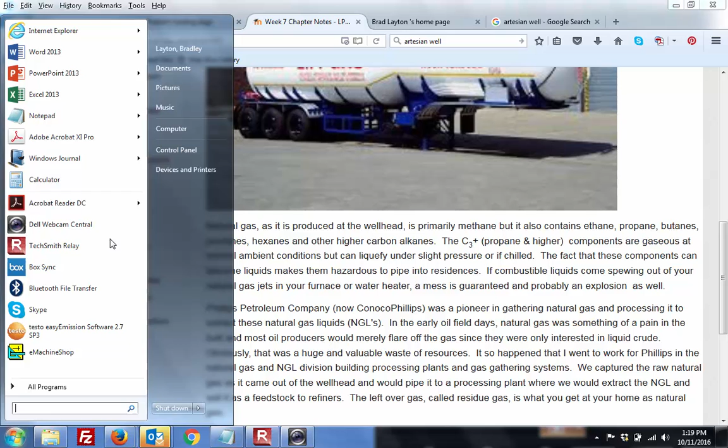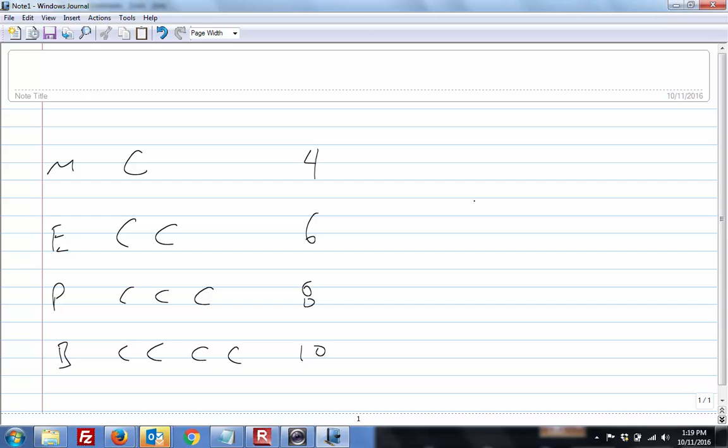The general formula for this, if we do a little simple math: here's methane, 2 carbons is ethane, 3 carbons is propane, 4 carbons is butane. And if we know this has 4 hydrogens, 6 hydrogens, 8 hydrogens, and 10 hydrogens, what's the formula for this thing? It's basically CnH2n plus 2, if that makes sense.

So let's try it out. For methane, if n equals 1, we have C1H, 2 times 1 is 2, plus 2 is 4. For ethane, n equals 2, C equals 2, 2 times 2 is 4, plus 2 is 6. If n equals 3, we have C3H, 3 times 2 is 6, plus 2 is 8. And finally C4H10, because 4 times 2 is 8, plus 2 is 10.

Of course, you could go ahead and draw these out, and in every case you have saturated bonds. There's ethane - I'm not going to draw all the hydrogens in, but you can count them, each line is a hydrogen - and then butane, just on up the scale. So if you see this formula, it's basically these simple hydrocarbons, starting with the simplest, methane.

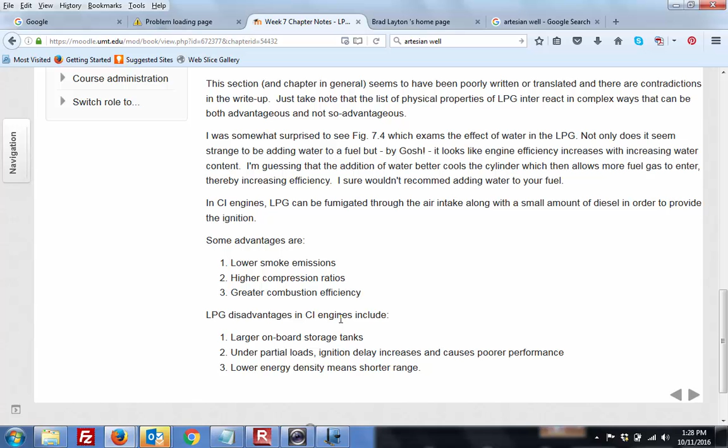So we already mentioned larger onboard storage tanks, and lower energy density, so you can't go as far unless you have a larger tank.

Wouldn't adding water also add oxygen to the process? Adding water - it says on that last page that you get better fuel efficiency. It looks like engine efficiency increases with increasing water content. I'm guessing the addition of water better cools the cylinder, which allows fuel gas to enter, thereby increasing efficiency.

It's a puzzle to play with for a bit, huh? Yeah, let's take a look.

7.4, that's a new one. That is not a test I have any direct experience with, I'll be honest. 7.4, let's dig into it a little bit. That's strange that you would add water, because water is one of the combustion products. I'm not sure why you would add a combustion product to your fuel in order to increase efficiency.

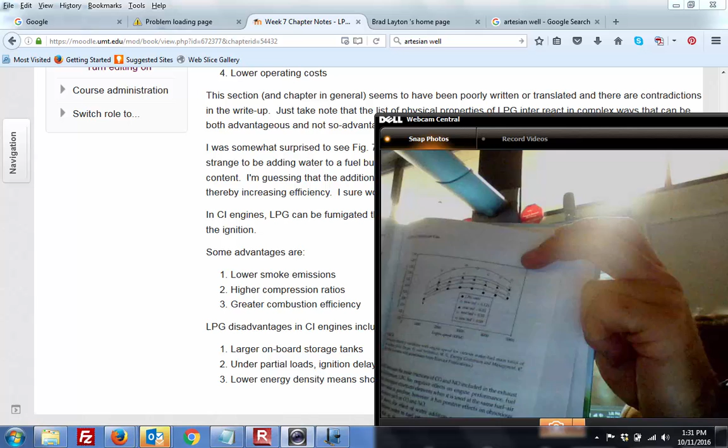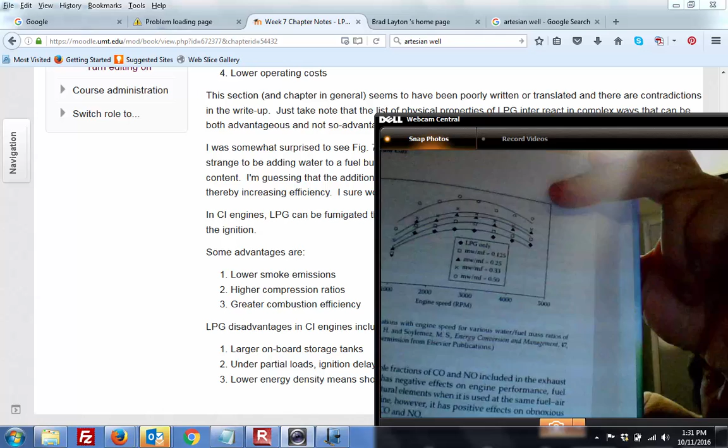Well, I think it goes to a sweet spot, and then it drops. It's not like - where's the sweet spot? What happens when I go to 60? I mean, in any other engineering chart - I'm not fully comprehending the brake thermal efficiency here.

I'm more looking at the integral beneath the curve here. Well, what I interpret the brake thermal efficiency to be is if the engine's just running under a braking load. And they're looking to see how much heat is being generated on that brake. And now, with just LPG only,

it is the lowest - this is the lowest efficiency overall. And as we get greater, so from an eighth to a quarter to a third up to 50%, at some point, oh, let's just put water in and burn. So this is not a well done graph.

The sweet spot would show, if in fact - 3,000 RPMs - well, but how about as a function? How about sweet spot as a function of water content? Where's the sweet spot? It's right on top. Well, then it's not a sweet spot because they didn't go all the way up to 100%. A proper graph would show it coming back down.

So when you got to 0.66, it came back down to where your 0.33 was. When you got to 90%, it would come back down to where your 0.125 was. So they didn't do a full fleshing out of it. Yeah, I like how they used the R program to make this diagram - well, you can tell by the X's and the O's.

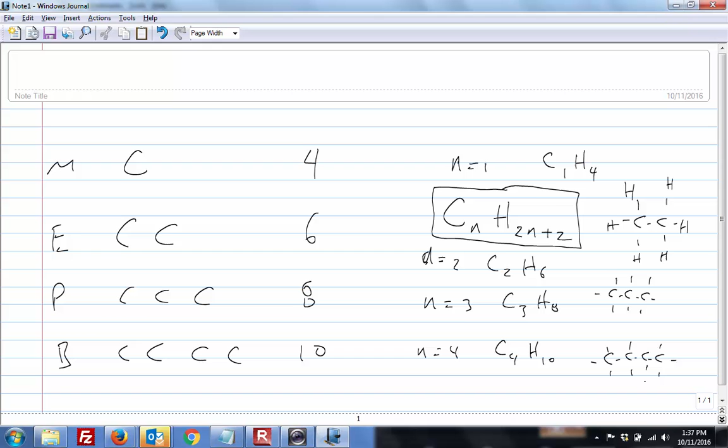I mean, we could do a little stoichiometry here. We like stoichiometry. So let's say we've got... let's see, we got this. Here's propane. We'll put butane in there.

And then if we just burnt these two guys, we'd have to dive pretty far into the thermodynamics here to get at this, but we just at least did the stoichiometry. And we started adding oxygen.

Let's just figure out. So we've got carbon coming out. We've got 7 carbons, and the only products we're going to get, let's assume complete combustion, and that's CO2 plus H2O. So simply we'll throw a 7 at that.

And how many hydrogens do we have? Sorry, 7, throw a 7 at that. And then how many hydrogens? We've got 6, 8 plus 10, 18, so there's a 9 there. So there's 14 plus 9, 23.

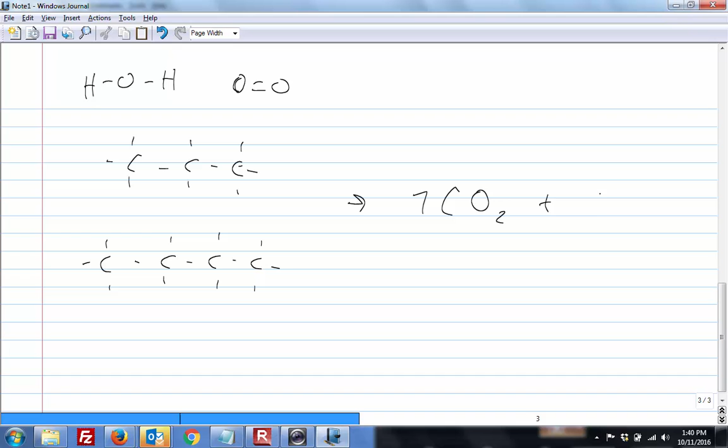Now, how many hydrogens do we have? So if it was 8%, let's see, what's the molecular weight on this guy? 12, 24, 36, 36 plus 8 is 44. And this is 12, 48 plus 10, 58.

And what did they say? What was one of the mass ratios? 50% water by mass? Well, yes. So that's 16, this is 18. So 44 plus 58 is, there's a 2, there's a 1, 102. So let's just say we had 5 waters going in. That's a 50%. So we have 5 of these guys.

Okay, so how many H2s do we need? We had 8 there, 18, plus another 10, 28. 28, 14. Yeah.

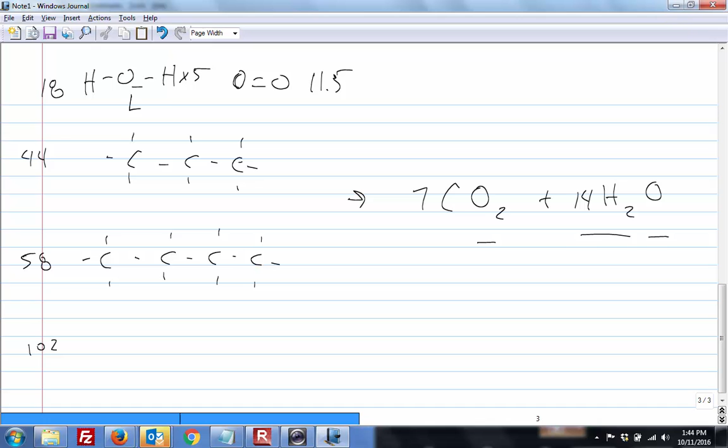And then the oxygen's coming out. 14 there, 28 there, total. 5 of the 28 are here, so either 23 are right here, 23 oxygens. So it's the same.

Yeah, it's difficult. I think instead of a full unit on that, you're gonna have to have 11.5 at something. Well, you could just double it to get to that, but I always want to simplify things instead of having it. No, it would in some ways be easier, but...

Well, yeah, so I guess the question is, if you are adding water to the fuel, are these waters simply passing through, are 5 of them simply passing through? Gosh, I gotta pause that for a second. This is kind of strange, I hadn't thought about it.

This kind of remains a mystery whether these extra waters are part of the combustion. Is one of these oxygens from the water coming over to the CO2, and are the hydrogens from the water? Well, the only place for them to go are back to the H2O. I don't know if there's a hydrogen gas intermediate in there or not. That's a good one, worth looking at, checking out. It's a good puzzler.

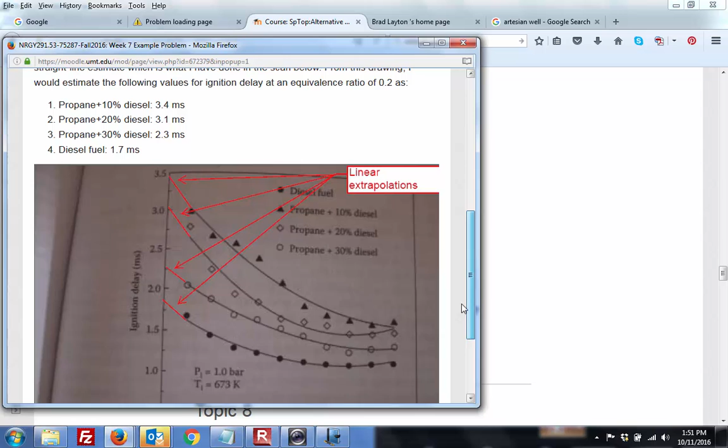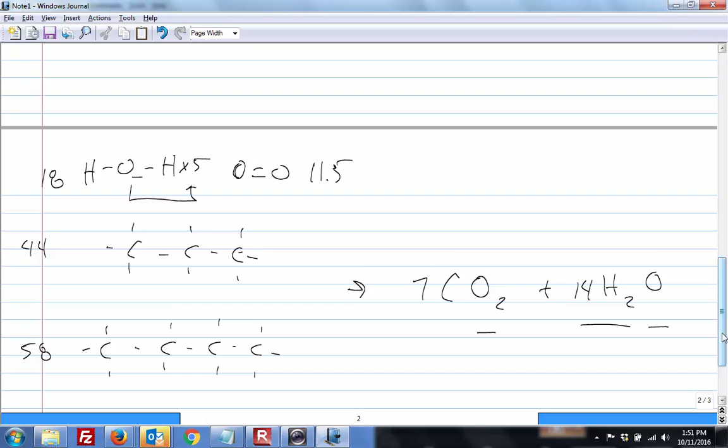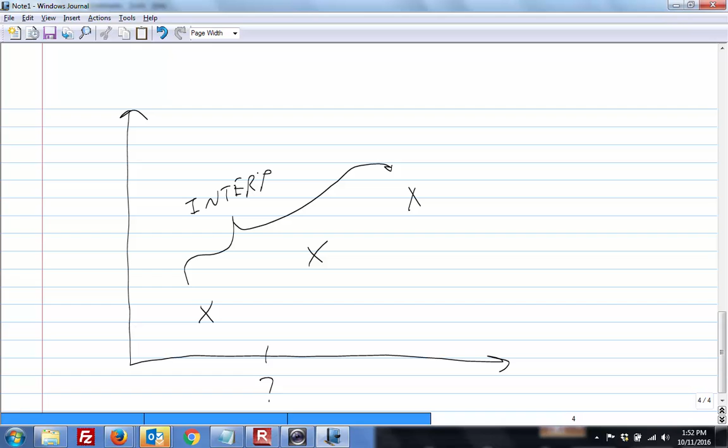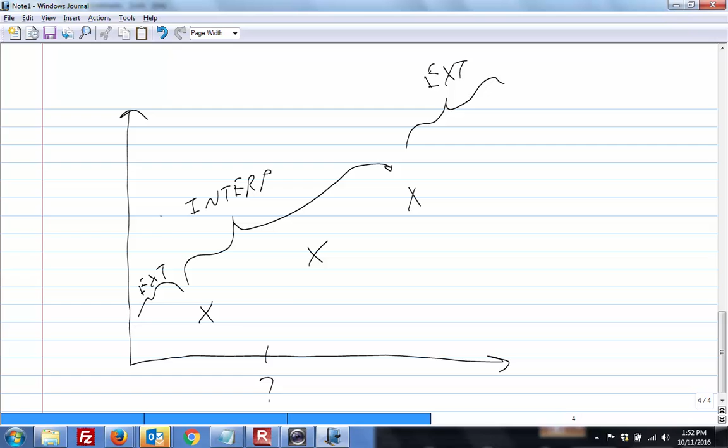I'll just remind you what interpolation versus extrapolation is. If we have a set of data points that are here, here, and here, anything that happens in this range—for example, if you want to know what's going on at this point—that's interpolation. If you want to know what's going on either at this end, that's extrapolation, and same thing here. So anything that happens within known data is interpolation, and anything happening outside of known data is extrapolation.

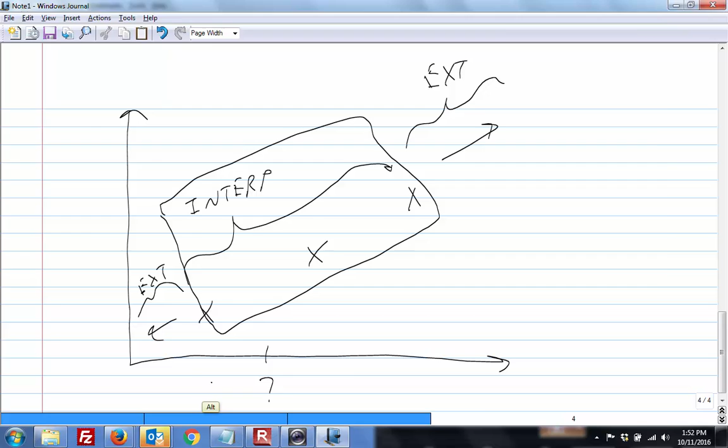Find the equation of the line and extrapolate it.

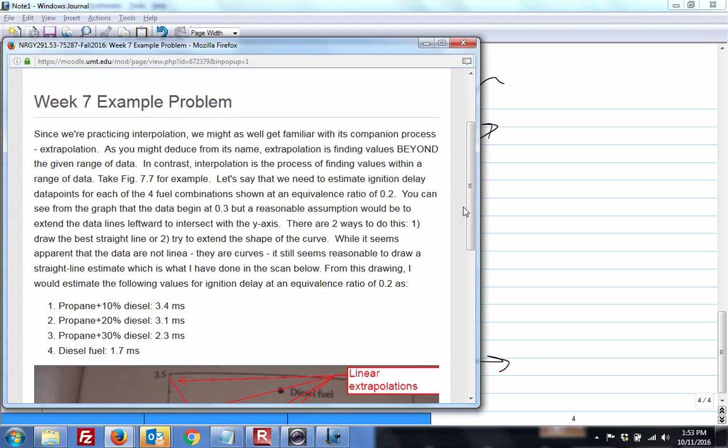Let's say that we need to estimate ignition delay data points for each of the 4 fuel combinations shown, at an equivalence ratio of 0.2. Here's full diesel fuel, here's 10%, the diamonds are 20%, and the circles are 30%.

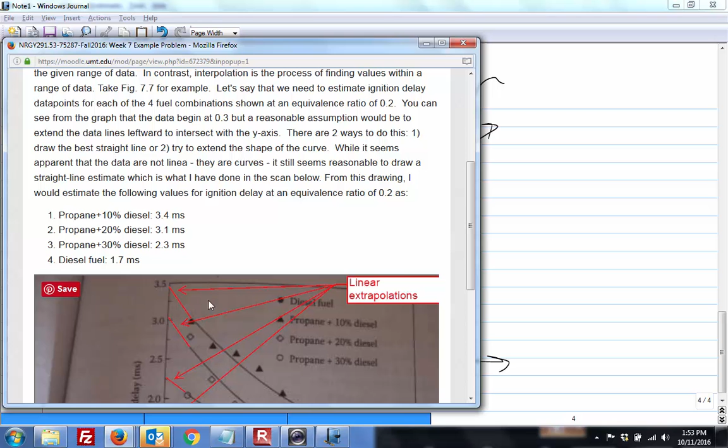You can see from the graph the data begin at 0.3, or essentially the 30%. But a reasonable assumption would be to extend the data lines leftward to intersect the y-axis. What's going to happen when you get all the way? We're already sitting on the x-axis there, at 0.2, see that?

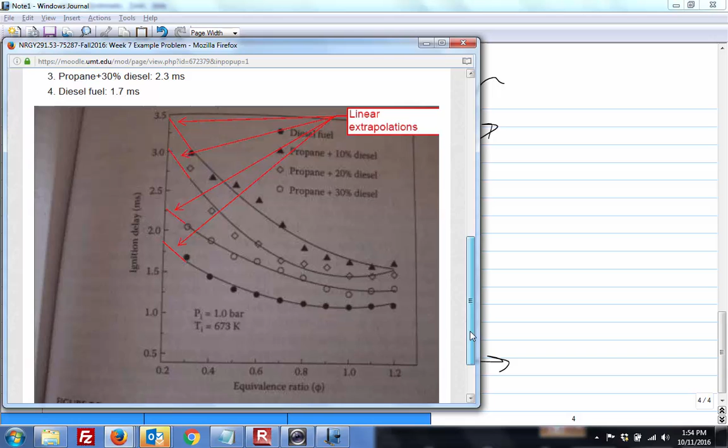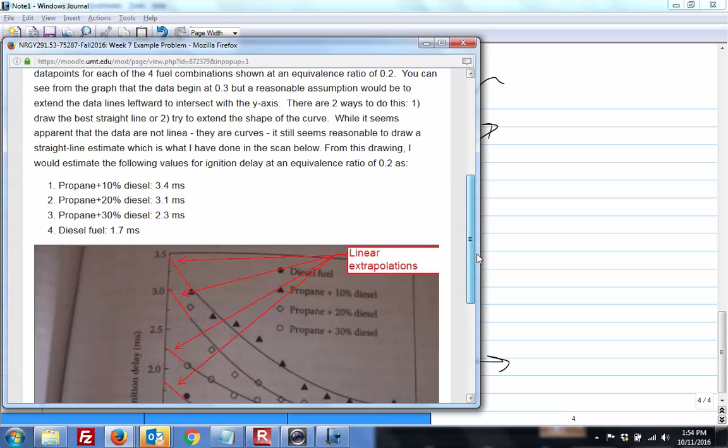So we're trying to figure out what the ignition delay would be at 0.2 for each of these. There are 2 ways to do this. One is to draw the best straight line, so the question is, in each one of these, is the red line sort of a straight line.

You can kind of look at that and say, oh, is it really tangent here or not? Or the second one would be to curve it somehow. Well, it seems apparent that the data are not linear—they're not, because they have this curve to them. They are curves. It still seems reasonable to draw a straight line estimate, which is what I have done in the scan below.

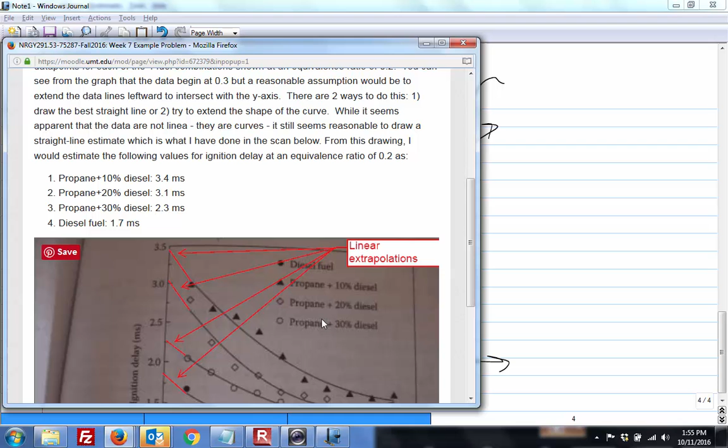From this drawing, I would estimate the following values for ignition delay at a ratio of 0.2: propane plus 10%, those are the triangles, comes in just below 3.5, so he calls that 3.4 milliseconds. 20% comes in just above 3, so 3.1. Propane, 2.3, and diesel fuel, 1.7.

And again, this is just kind of eyeballing, and unless you have some kind of equation for this thing or data, there's a fair amount of uncertainty in terms of exactly.

Is that exponential? No, I'm not going to say these are exponential. I'm not going to say that it's some kind of least squares fit, but the function—it's anybody's guess.

The one thing that makes this a little suspect is that these 2 lines tend to cross out here. And the other thing that makes it quite suspect—there are no error bars on any of these dots. If you were to do this experiment, you would repeat every one of these data points 5, 10, or 20 times and have error bars on them, which would presumably bring them into some type of actual function. Because just seeing that big belly in that curve right there versus that one makes this suspect.

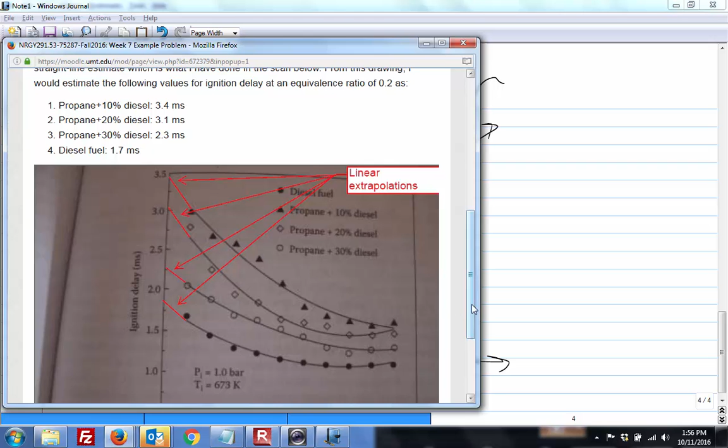So I wouldn't say this is the most scientific study, but at least it gives you some kind of ballpark. I think that's all he's doing there.

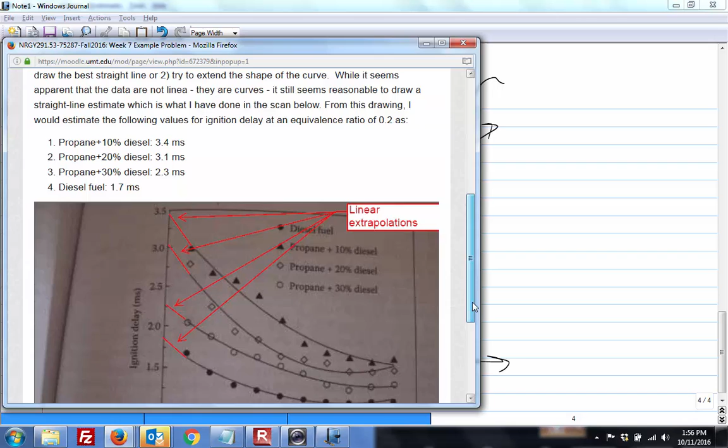So what does he want us to do? Well, let's take a look at the homework. That's the example problem.

Using figure 7.11 for propane, figure 7.11 on page 218, for a percentage of 90%.

So in this case, what he's...

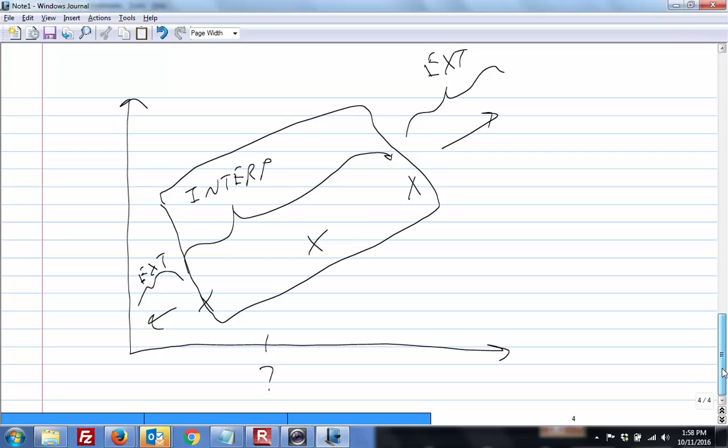So here's what I'd like you to do on this chart. He's asking, you're out here at 0.9, and there's a couple numbers here. I'm not going to use the exact numbers—I don't want to give away the answer. But let's just say this is 0.25, and I'm going to intentionally use a different number. I'm going to say this is 0.35.

And let's just say we want to know the number at 0.31. In fact, I'll give you a slightly more challenging problem and let you simplify it for the homework. Okay, and what we'd like to know, we'll just do it linearly.

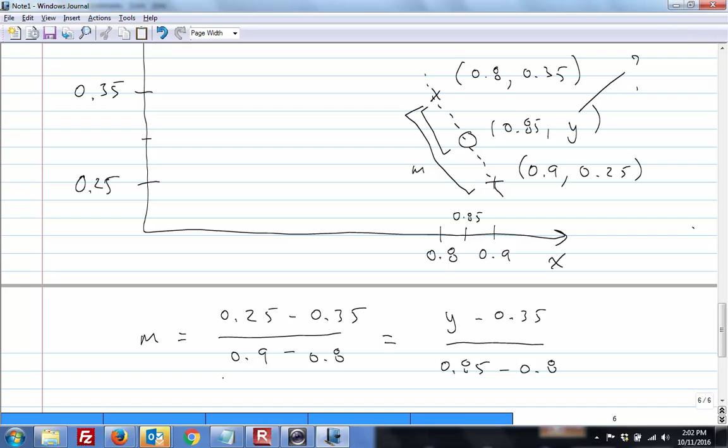So just to review what I did, this first line, I'll call this line number 1. It's this guy right here. And the second line is number 2. And all I did was assume—well, I didn't assume it, I know that the slopes are the same because this point that we're looking for right here sits on that line. So the slope's the same.

So these are the 2 points I know. Starting off with these 2 points I know on either end, and I'm just looking for this value. This is y right here. Newton-Raphson method. Okay, so from there, I can just solve it. Equals 0.1, that's a negative 0.1.

9 minus 0.8 is 0.1, equals y minus 0.35 over 0.05. Now I'll cross multiply, and I've got negative 0.05 equals y minus 0.35. Let's see if I've made any mistakes here or not. Let's see what I'm doing.

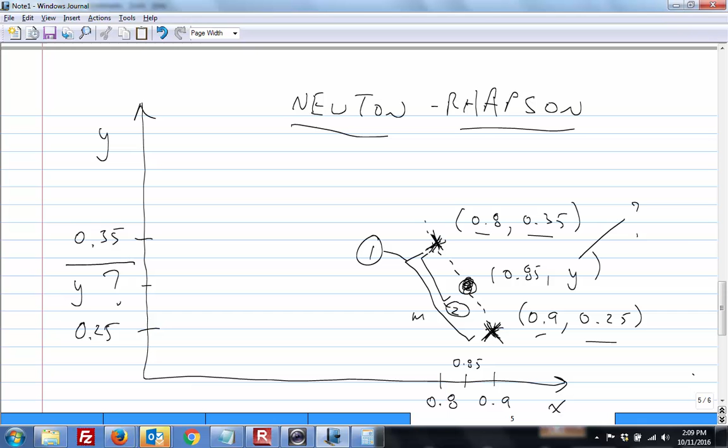It was that. So just to review what we did: use the Newton-Raphson method to find the y value of this unknown point. We said we were going to start off with this top point here, which is 0.8, 0.35. We know this other value down here, which is 0.9, 0.25. And we know we're looking for a value midway between the two on the x-axis. So in order to do so, we know that the two lines are, in fact, collinear. That midpoint is on there. We set the two slopes equal.

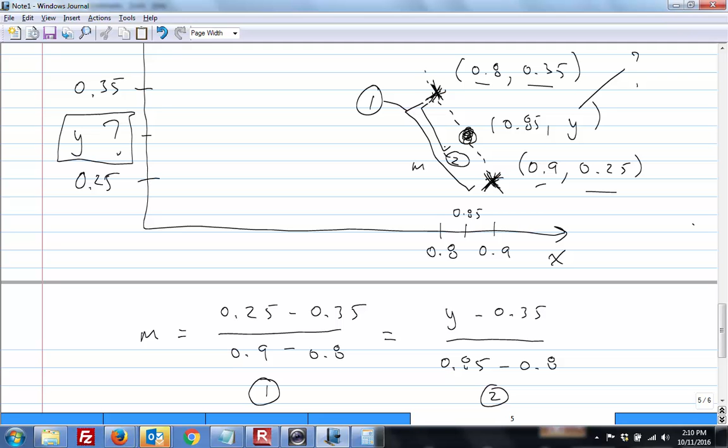It's just slope is rise over run. So we subtracted the leftmost point from the rightmost point. So there's your rise on the top, here's your run on the bottom, and said that equals the rise over the run of line 2, which is just the top half, if you will, of the interpolation line, and came up with a little bit of algebra that the value is 0.30. So that's interpolation, plain and simple.